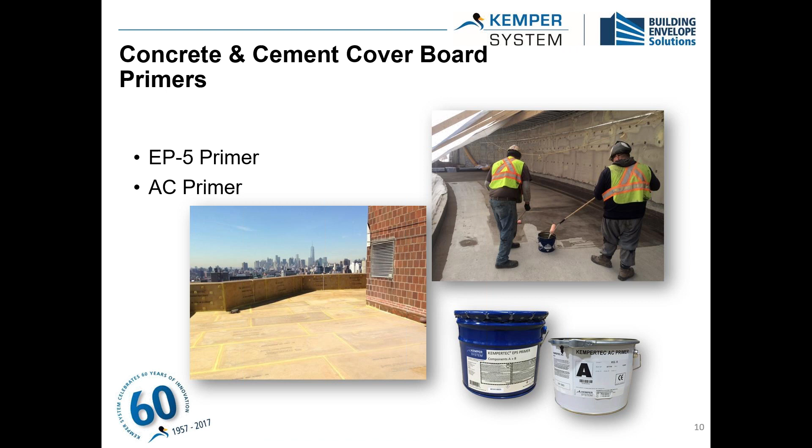So they were concerned about how this was going to work, going up on a roof that was almost 20 years old, cutting in skylights. They found that they were able to cut their skylights in, drop their curbs in place, get out some MEK, wipe down the existing roof, and flash our product right into our existing product.

Ironically, this roof is still performing perfectly, and to date, there have been no reported leaks on this facility.

Our first project in the US was for Tacoma Power and Light. We did the power dam. It was a very, very expensive project. There was a lot of Kemper involved in this. You take a dam into account, you've got a lot of moving water through there. So they spent a lot of time going through our products and understanding our products before coming on our two-component system.

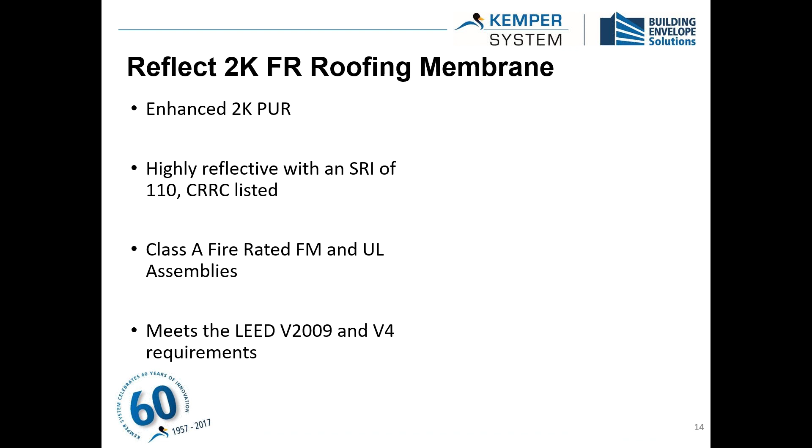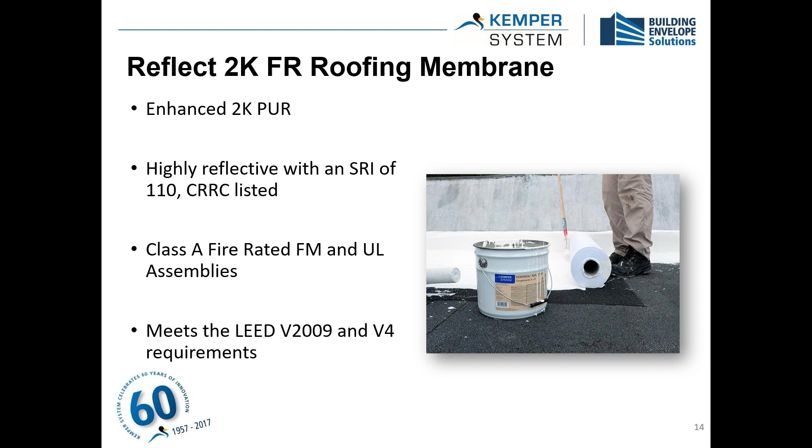So let's jump into the meat and potatoes, talk a little bit about our product and system overview. A lot of people are afraid of waterproofing, especially if you're in the roofing industry. Waterproofing may not be your niche, but waterproofing is pretty straightforward. It's 3 steps, or 4 if you want to put a decorative finish on it. The most important piece, obviously, is the prep and cleaning of the substrate.

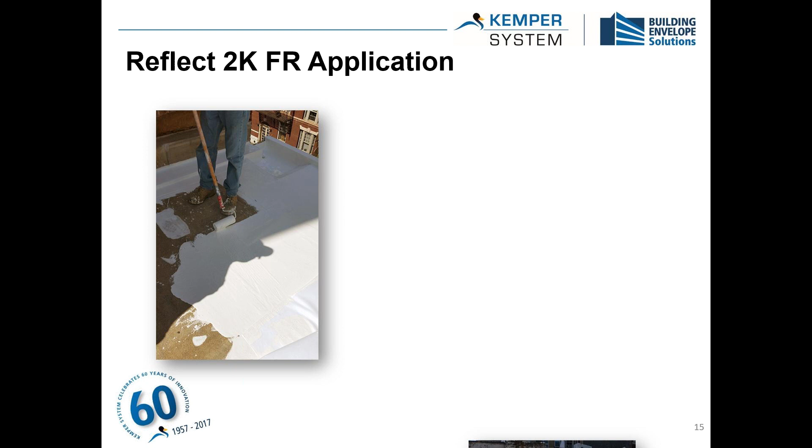We love concrete, although we don't need concrete. We can use many substrates, but in this particular situation here that we're showing, the primer is applied directly to the substrate. Then on top of that, we apply our membrane. And the 4th option is if you want to put a surfacing on it, like a ceramic quartz or a non-slip. That's usually used on patios, decking where there's a slip potential, parking decks for walking, working surfaces, and vehicular surfaces.

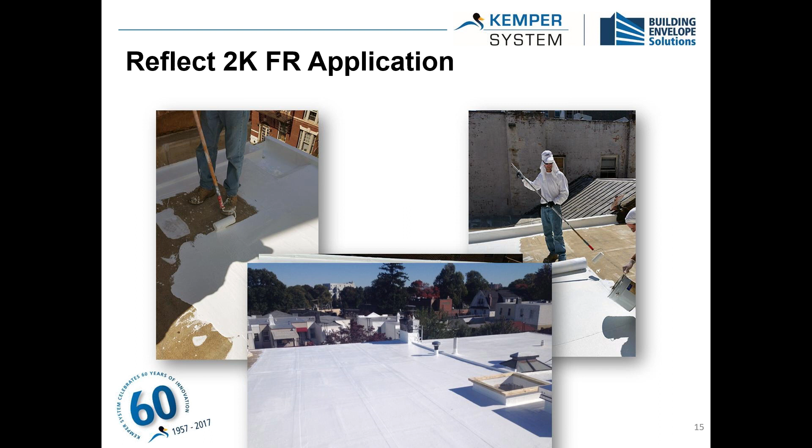Concrete and cement coverboard primers - these are our 2 main primers for our 2 main systems. EP5 is an epoxy-based primer that works with our 2K system. It's installed on this picture here on the right. It's rolled in place. The good thing about this product is once it's down and cured, depending on the humidity, but you're looking at about 8-hour cure time. You've got about a 30-minute pot life once it's mixed, and within 8 hours, you are 100% waterproof.

This will provide a waterproof coating on your deck for 7 days before the UV affects it. So if you need a temporary waterproofing system before you're able to get your actual waterproofing down, this is a great primer for that. We also have a PMMA primer, polymethyl methacrylate, and that is our AC primer that's used for our PMMA.

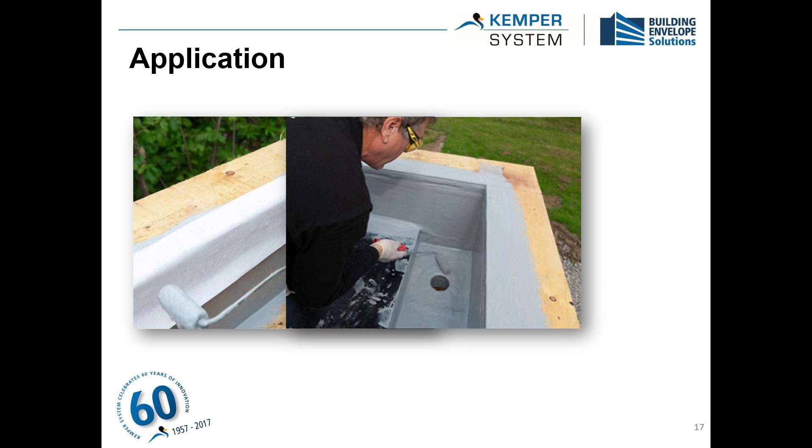We have a plywood and metal primer, which is our 2nd primer for our 2-component system. There's 2 different types, D and R. The way I tell people to remember the difference between the 2 of them, R is rapid. So if you're doing a small area, you need something to cure out in about 2 hours, and you need a very, very quick flash of about 5 minutes.

Use a small container, install your primer. 5 minutes later, it's tack-free. You don't have to worry about bugs or debris getting into it, and 4 hours later, you can recoat it. That primer, both the D and the R, they stick to just about anything out there. It will stick to concrete, but we would rather use the epoxy-based one on the concrete. And then our AC primer, or our PMMA primer, that also works on the plywoods and the metals.

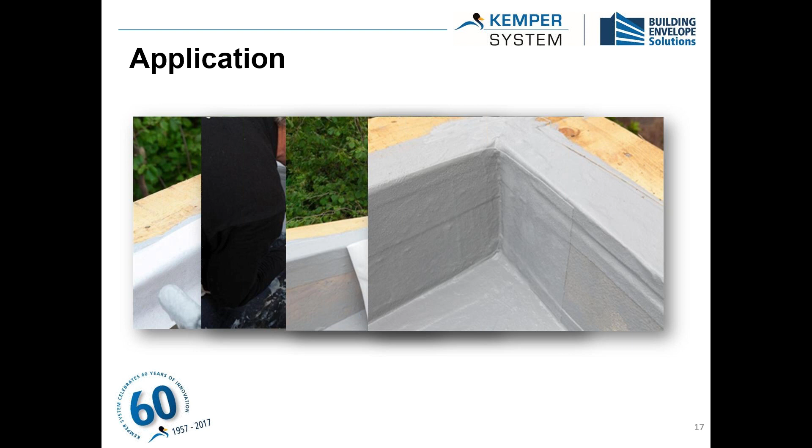A little bit about the roofing and waterproofing resin system. Our bread and butter is our 2K PUR. The K stands for component. Think about the Mercedes brand - you've seen a little small sports car that they make and they call it a Kompressor with a K. Well, Germans like to use a K when they're talking about that sound of their vowels. So this is 2-component polyurethane, odorless and solvent-free resin.

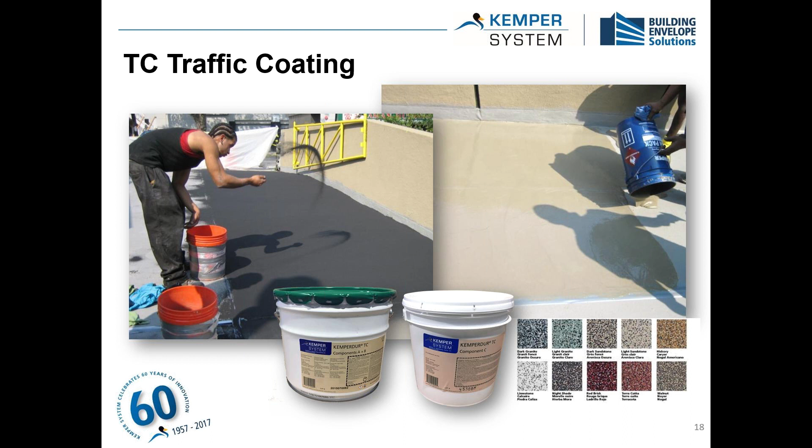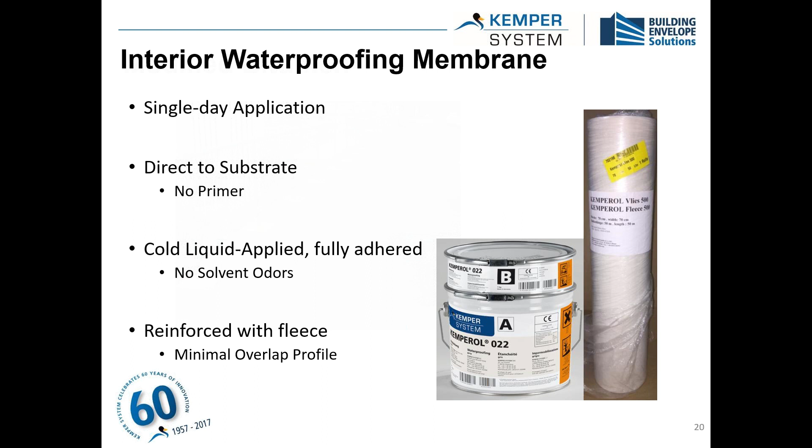This is what the buckets look like. Here's a completed roof system over top of a modified system. You can see the seams underneath.

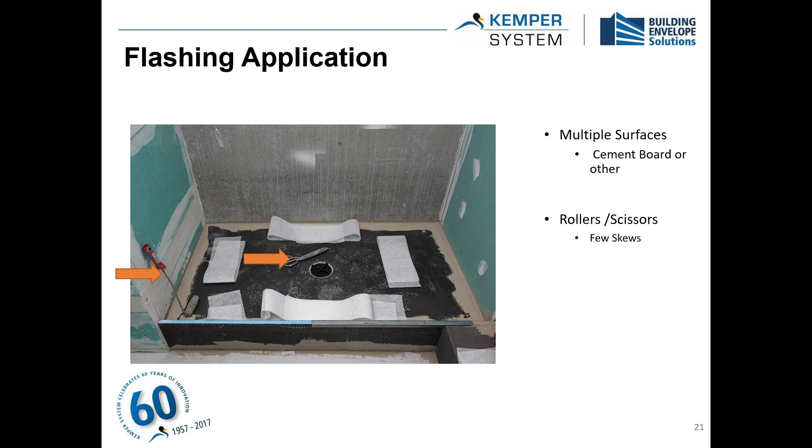We do have a butt splice detail that can be used if overlap. I call it overlap, although it's not truly an overlap or a seam. You've got about 170 mils on this overlap where these two sheets of fleece come together. There is a way to minimize that with an under joint and a butt splice detail.

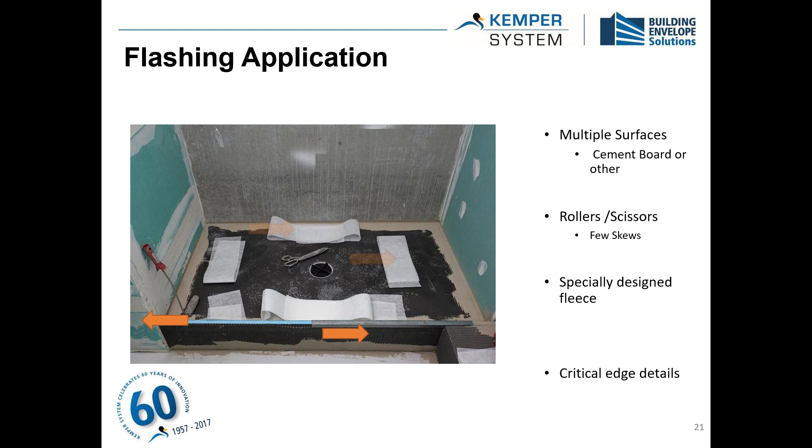Something that we do different than typical roofing is we do all our edge details and flashing first. A lot of times we'll get a question, well, what about bucking the water as it runs down that curb or that parapet edge and it hits a roof? Or are you not worried about it bucking water at that seam? Well, again, this is a seamless technology, so the seam is not there.

Here's a completed or just about completed corner detail. He's got a small drain going down into the roof system there. It's completely flashed around all that.

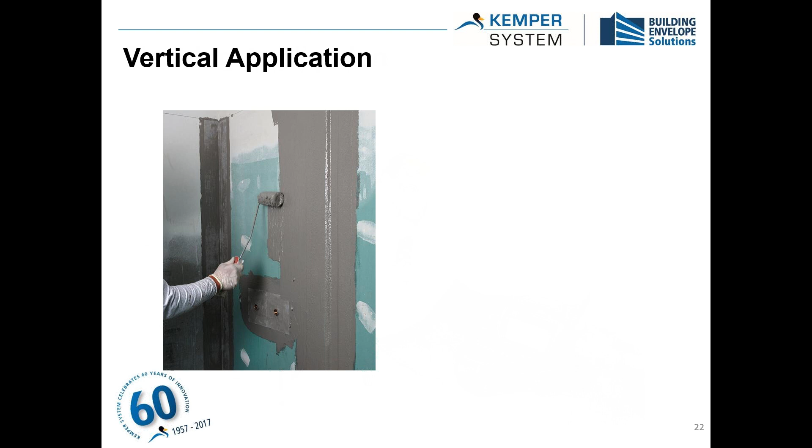See, he's cut all his fleece to put it into place. And there's the completed system. So you've got 70 to 80 mils in the field of a dry millage once it's dry, and anywhere you have your overlap materials, it will be doubled.

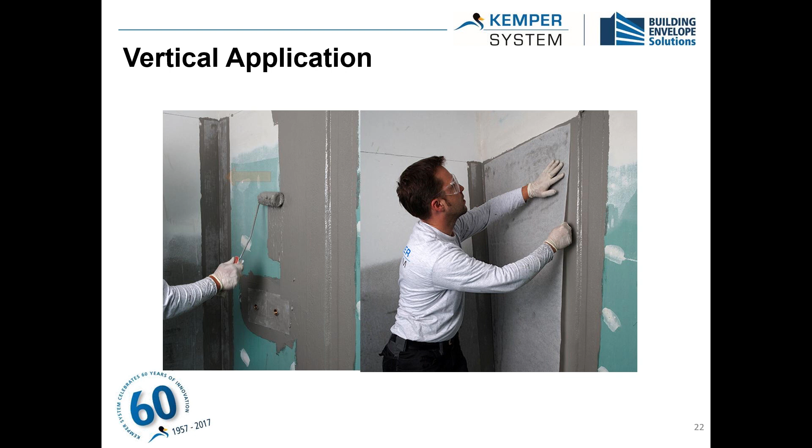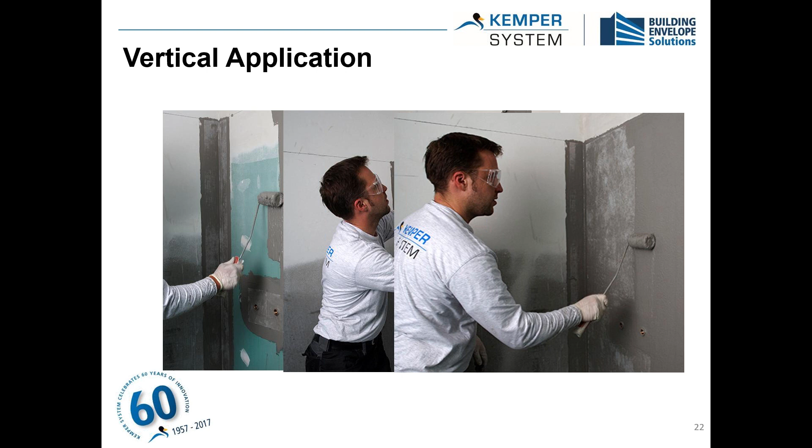Kemper has a full modified line. The reason we have a modified line is so many times our systems with the Kemper, with the 2K, needs to tie into a modified system. So this gives us the ability to provide all the components that are necessary to complete this type of a system.

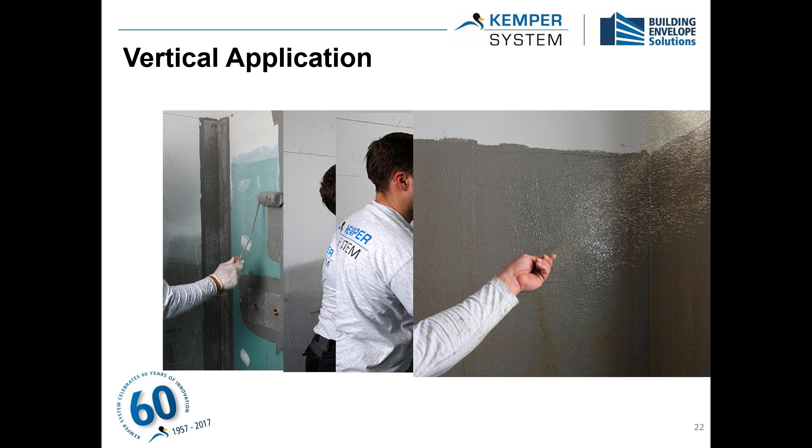We also have an interior waterproofing system, single day application, which is very, very nice. Many of the interior waterproofing systems are a 2-day application. Another benefit that we have is there's no primer necessary, so we go direct to substrate - you don't have to wait for your primer to cure off. Multiple substrates can be used, it can be cement board, it can be green board. Your typical wet environments, that's kind of the items that you're going to run into.

No odors or solvents in this. So if you are doing a renovation in a home, people are still living there, you're putting in a new shower pan, or you're updating a laundry room, this is an ideal product where you don't have to get the people to evacuate the house because of smell.

Our fleece is a patented fleece. It's needle punched, so it's not a random weave. You hold it up to light, it's very difficult to see through it. It is an actual true needle punched fleece.

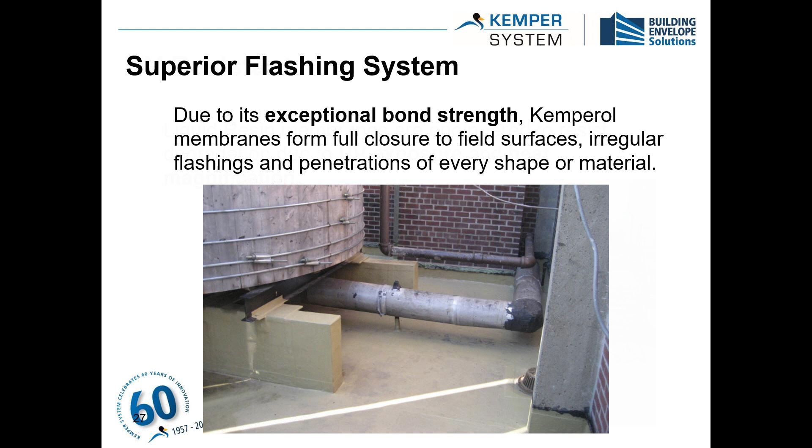Now he's going to put his corner detail or his edge detail in. It's a 4 inch wide piece of fleece. It goes up the wall 2 inches and out into the field 2 inches.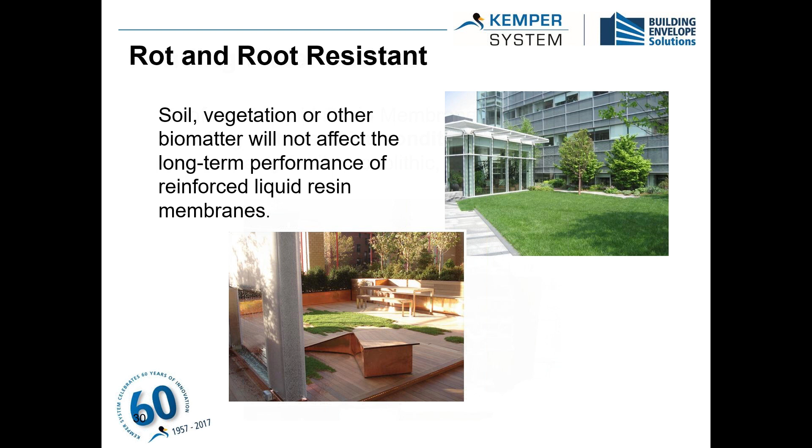Once you've finished applying it, and while the product is still wet, a light broadcast of sand gives a great adhesion key for the guy coming behind you to put on his tile.

What makes us unique in the marketplace?

Seamless technology, that's what it comes down to. You've got a completely seamless application on a roof. There's not going to be any breakage at a bond line. This is truly a fully adhered system.

Many single plies are put down and sold as a fully adhered system, but we all know when you put down your ribbons, it's not fully adhered. It is partially adhered, but it is adhered. This is a true fully adhered system.

You can see here we're sticking to a metal roof. Like I say, we can attach to just about any structural surface. Doesn't matter if it's horizontal or vertical. It actually doesn't even matter if it's inverted.

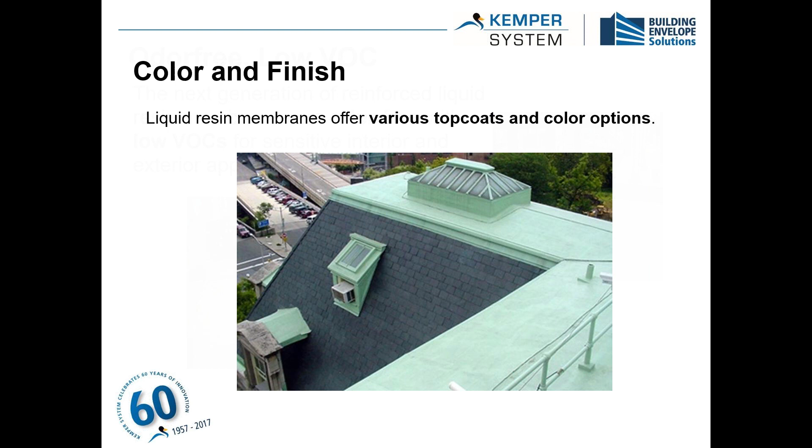One of the niche markets we're in is tank lining, and we're able to go inside large tanks, whether concrete or metal, and do the upper end, the upside, the bottom side, completely lining the inside of these tanks. This product will hang from the ceiling, it'll stick to the walls, and you don't have to worry about it running.

Another great thing about this type of system is it is UV resistant. As I mentioned initially, our primers are UV resistant for 7 days. Within 7 days, if you haven't been able to cover it, you'd have to recoat it before the 7 days expires. So every 6 days, you could put down another coat of primer and continue to keep your roof waterproof.